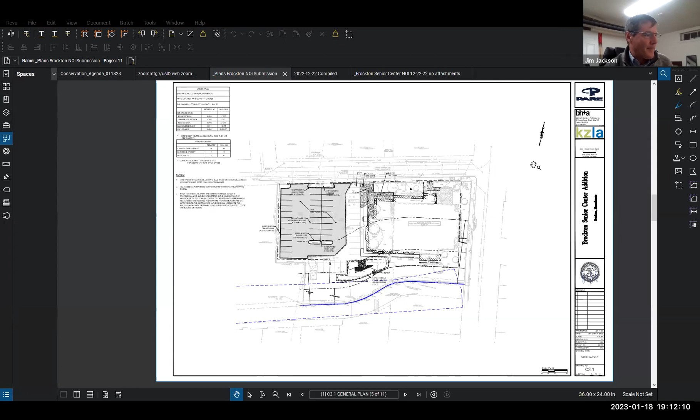Is that coming up all right? It's really small. Not good for my senior eyes. Yes, adult size, please. Is that coming up in size here? Yeah, that's better. Getting there. All right, just going to do a quick overview of the resource area there.

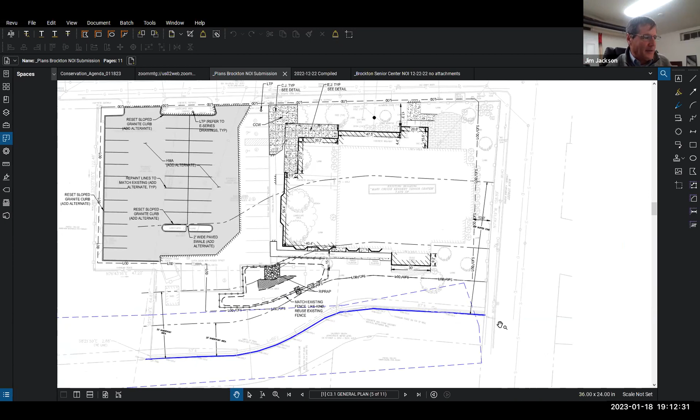Reason we're here is Salisbury Brook is to the south of the property. The portion that abuts the project is the concrete wall that retains the brook along here. Our surveyors picked that up, so that's an accurate location. We also had our wetland scientists go to the site and confirm that that was actually the limits of the resource area, and they were able to do that.

So the existing conditions: the parking lot here drains to a catch basin, which then goes back into Father Kenney Way road drainage system. The new parking area that Brad was just talking about is in this general area here, and some of that flows to the catch basin, and some flows to a bioretention area that was constructed with that 2020 project to expand the parking. That bioretention is right here.

The main addition is this piece. This is the edge of the existing building, and the new addition is right in here with more addition in front of the building, and this small piece on the back in the footprint of the existing sunroom that is going to expand the kitchen.

So what we have done to accommodate the new drainage from the addition: we're going to have more impervious area from that, so we're going to collect all the roof drains, which are clean runoff, and direct them into the bioretention area. We will do an enlargement of that bioretention area to accommodate the increased flows from the addition.

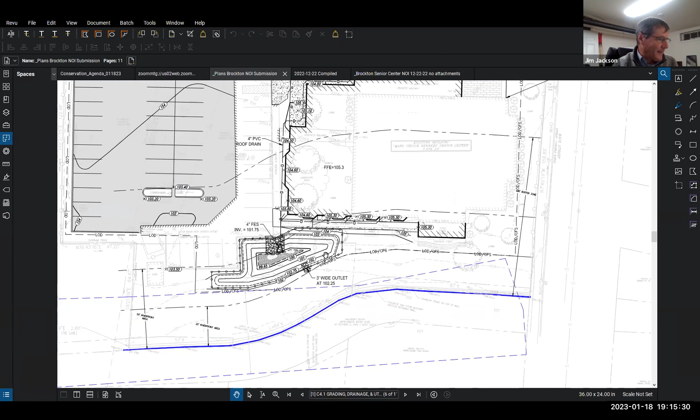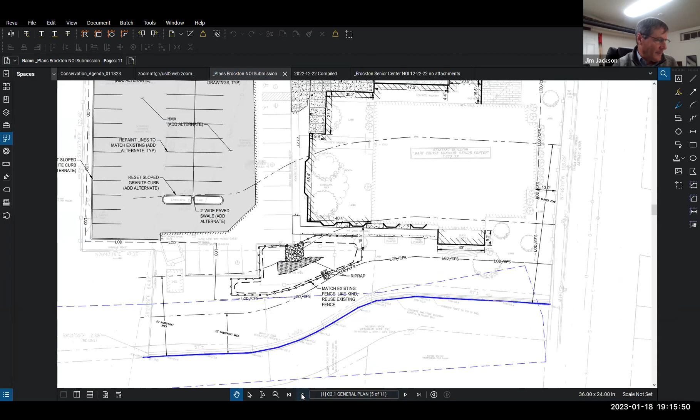It's not significant. This is kind of a footprint of it here. It's about a 40-foot by 15-foot area at the bottom, and the previous was probably about a 10 by 20. So we've increased it.

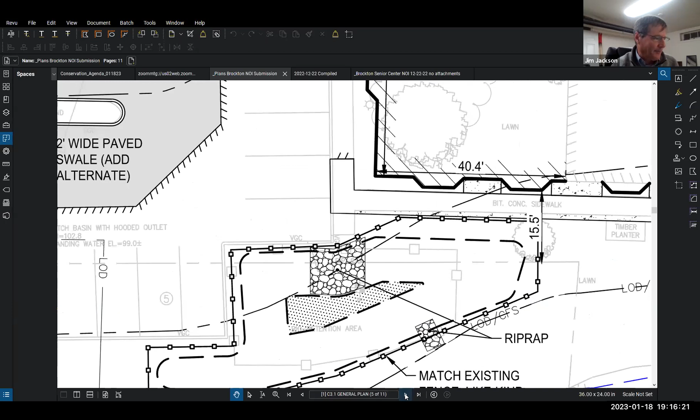I have a question. I've been to the senior center and I've seen that retention area. Doesn't it have plants planted like blueberry bushes and things at the bottom of it? It did have a couple of bushes. They didn't look all that healthy this time of year, but we do have a landscape plan where we're going to improve that area.

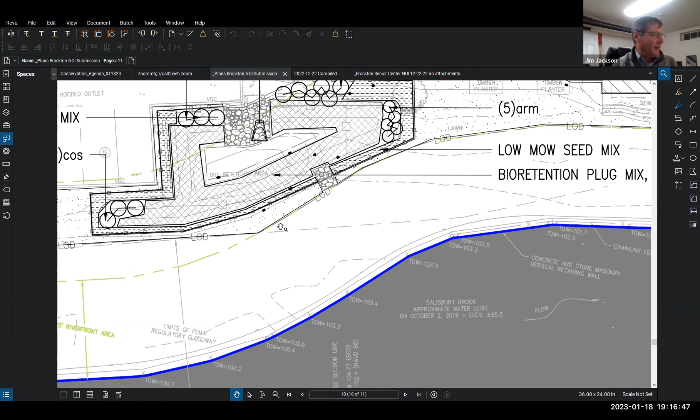But there'll still be vegetation at the bottom of the retention area? The bioretention area itself will just be the bioretention soils, but we will have a bioretention seed plug mix on the side, and then we're adding shrubs around the bioretention area, as well as some trees on other parts of the site.

And on the back of the building, they had two garden areas. Is that being removed, or is it being retained? Planters, yeah, these two planters here. Yes, Brad, do you know if those will be retained?

Yeah, I think the intent is to relocate them if we can. We've got a new sidewalk that serves the kitchen area here, and they'll probably have to be slid down south just slightly. I know that the Boys and Girls Club comes and helps them plant flowers and herbs and things like that.

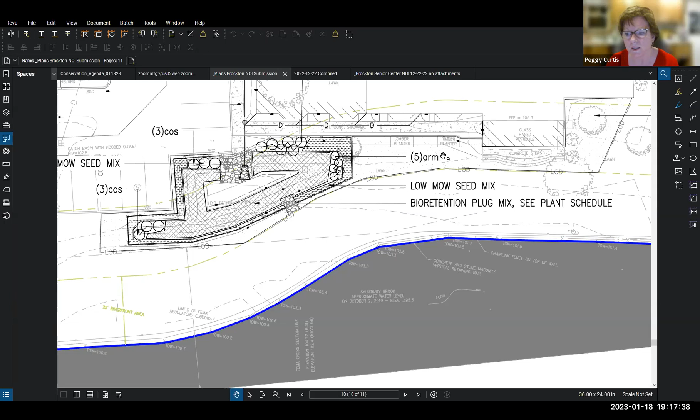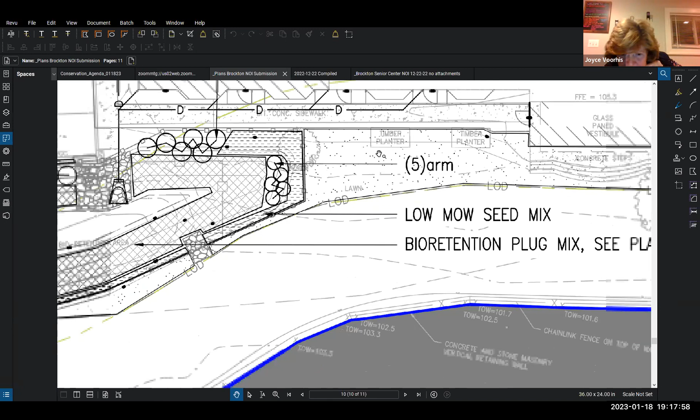Yeah, so they're basically right on the edge of what will be the sidewalk. I think they'll have to be displaced during construction and then reconstructed. So the edge of that retention area is right up against the 25 foot, is that right? 25 feet away from the riverbank? This line here, so yeah, we're just a couple of feet off of it.

Is there anyone else from your applicant pool that would like to speak?

Ms. Fitzgerald? Yes, hi. Good evening, Madam Chair, and good evening, Commissioners, and good evening, Mr. May. It's great to see you all. Let me first say thank you to Megan. We've worked on a previous project together, and you were so easy to work with, so helpful, and I wish you luck in the future.

As Brad had mentioned, the building is getting a little old. It's 20+ years old, we haven't done any renovations or updates in that building. Our recent 2020 census has educated us that we've had an increase of over 3,400 older adults in the community. So certainly we need to have a senior center that can accommodate the increase in numbers. The expansion does improve our ability to serve the community and provide the programs and services to our older adults. I'm in support of this project, and I'm always available if anyone has any questions. Thank you.

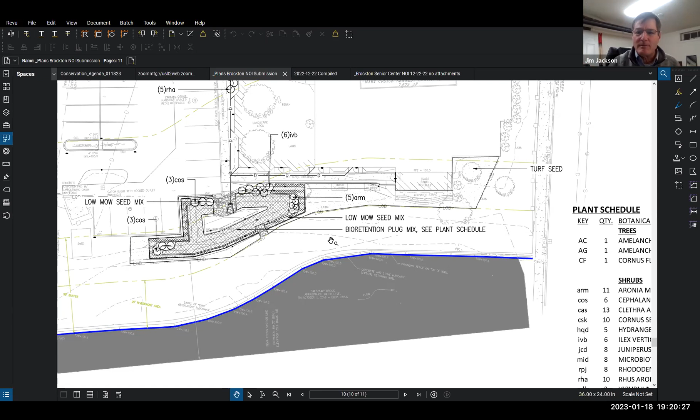Is it Mr. McCord that has control of the map? It's myself. Okay, could I just see, not the river side of the building, but the other side of the building? Is there any room to build out on that other side? Or up towards Father Kenney Way? Where's the road limit? Yeah, so here's the curb line. We are building out in that direction somewhat. And we're trying to re-landscape that area too to improve it.

If I can add to it, this is Brad McCord from Bargman Henry again. So our intent was trying to stay within the building footprint, again staying underneath the canopy for our extension, and minimize any kind of additional building towards Father Kenney Way. I will note that there's a memorial brick paver patio that we're maintaining, right where Jim's got his cursor. We're extending the sidewalk so you can access that still. And then proposing a few new trees, as Jim had mentioned, kind of throughout the whole site as much as we can. Not a lot of green site on here, but we're trying to take advantage and put some more vegetation back on the corner.

Is 4,000 square feet really enough to accommodate the 3,400 people that have the influx? It looks kind of small to me.

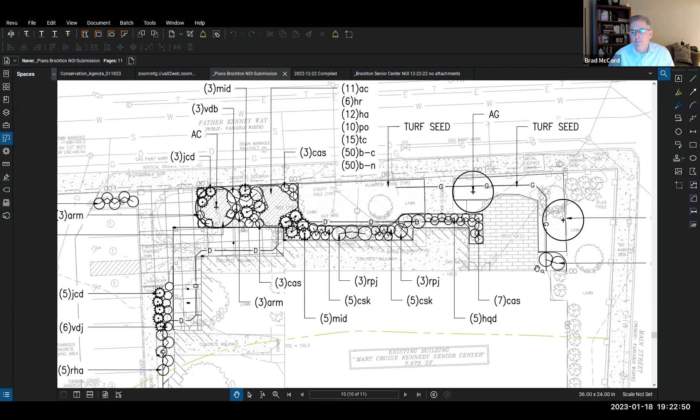So what we've done, I'll speak to it and then I'll let Janice add. What we've done is we've tried to create as much flexibility in the space. We've got the multi-purpose room, we've added about 1,000 square feet, but we've got it subdividable so that we can divide it into 3 different meeting groups or activity groups simultaneously. So I think that's a big plus right off. And then we're also trying to take advantage of some smaller social gathering spaces for those groups that don't need much, just a small group of 2 or 3 people that can meet and talk. So we've tried to take advantage of every square foot and make it as flexible as possible to serve a wide variety of needs.

And Madam Chair, by adding the additional multi-purpose rooms, if you're familiar with the senior center, a lot of times we have to turn people away when we have large events because we just can't accommodate them. But by adding those, especially those 2 extra multi-purpose rooms, it gives us more opportunity to have larger events, but also we can divide up those rooms to make smaller rooms. The center, as you walk in now and see the grand fireplace, that's a beautiful area, but it's non-functional for us.

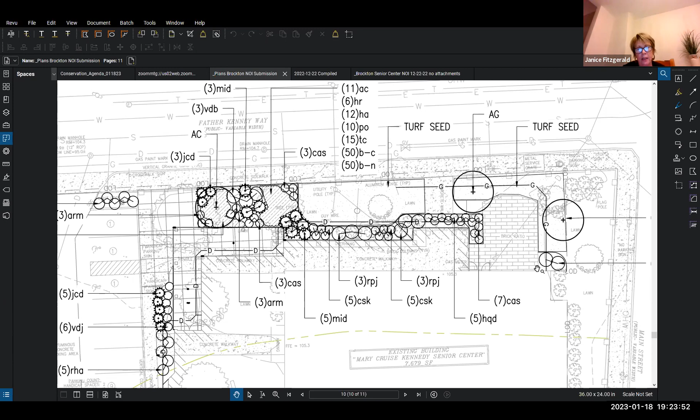We can't hold events, presentations, things. It really is wasted space. So by configuring that, relocating the kitchen, giving us additional multi-purpose rooms, and repurposing some of these other rooms along with additional office space, which allows me to bring in additional staff.

I think what the designer has come up with is really great use of what some may say is a small area. We've looked at this, we've discussed it, the staff has looked at it, the board has looked at it, we've all reviewed it, and we think what the designer has come up with is really a functional, nice space for the older adults in the community.

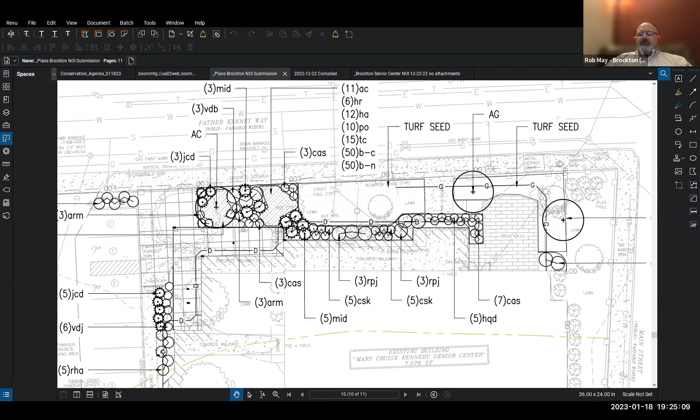Madam Chair, if I may, a city the size of Brockton at 106,000 generally has a larger senior center than what we have, even with this extension. We generally have more staff, but given that the city is budget constrained, this addition is going to allow a lot more flexibility and usability for Janice and her staff, who do a marvelous job of taking care of the seniors in our city.

I've heard nothing but good things about the senior center, really. I haven't made it over there yet, although my age says I should, and I will. But thank you. Thanks, Mr. May.

I didn't mean anything by the smallness, I just figured you need more. I've been to the senior center and it's wonderful. I wanted to make sure you have enough space to do all the wonderful things that you do, and after the extension, you don't want to outgrow it too quickly and then want more space. So that was the reasoning behind my asking that question.

Thank you, that was a good question. Mr. May, is that the only senior center in Brockton? Yes, ma'am, it is. Wow, amazing what they do out of that space. Peggy, we should have a larger facility. Unfortunately, budget wise, this is what we've got. Thank you.

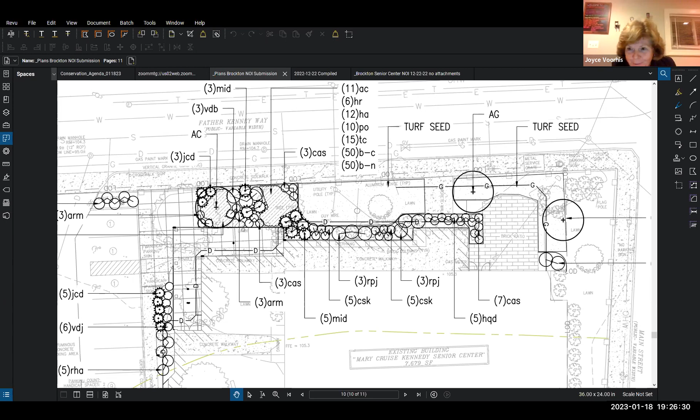I don't see Dr. Shave. Dr. Shave, are you there? For some reason you've dropped off my screen. Your report, do you have anything? I'd really like to hear what your report has to say. Your summary? So just to summarize what we're looking at for resource areas here.

As was mentioned, we're looking at Salisbury Brook to the south of the site here. Salisbury Brook is channelized, it has a concrete bank, so to speak. So jurisdictionally speaking, the bank is basically at the channel. And because of that, both the 25-foot riverfront and the 25-foot buffer zone to bank overlap due to the verticality of the bank itself.

So based on that, they're proposing the same limit of work that they used when they did the parking lot expansion about 2 years ago. So they are proposing a limit of work along that boundary, which keeps them out of the 25-foot buffer and the 25-foot riverfront. Fortunately, as they explained, the area where they're doing the expansion is already their existing lawn and walkway area, so they shouldn't need to do any additional clearing within the remaining buffer zone. They should be doing the construction within the existing lawn area and then the expansion of the existing bioretention basin.

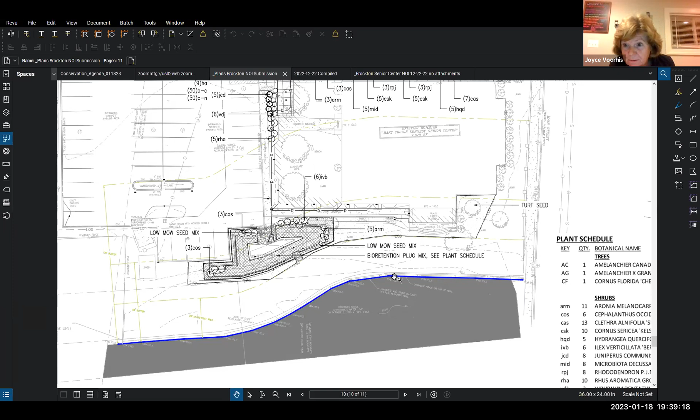Commissioners, any questions, any more comments, concerns? No? Okay, then I would entertain a motion to close the hearing. I make a motion to close the hearing. Second. Motion has been made and seconded. Vote please. Biegler, aye. Curtis, aye. Voorhis, aye.

Are we making a motion for a partial certificate of compliance? Notice of intent, hang on. Yes please. Okay, I make a motion for a partial certificate of compliance. I think it's order of conditions, right? We have to issue an order of conditions first. Oh, right. And the compliance is after things have been done. Okay.

So we need a motion to issue the order of conditions with the special conditions, including one that requests a report from the city engineer. Okay, I make a motion for order of conditions and to include a final report from the city engineer after all relevant boards have been evaluated. Second. So the motion has been made and seconded to issue an order of conditions for Father Kenney Way for the senior center expansion with special conditions, including the final report from the city engineer after all boards have been evaluated. A vote please. Biegler, aye. Curtis, aye. Voorhis, aye. Thank you very much. Motion passes.

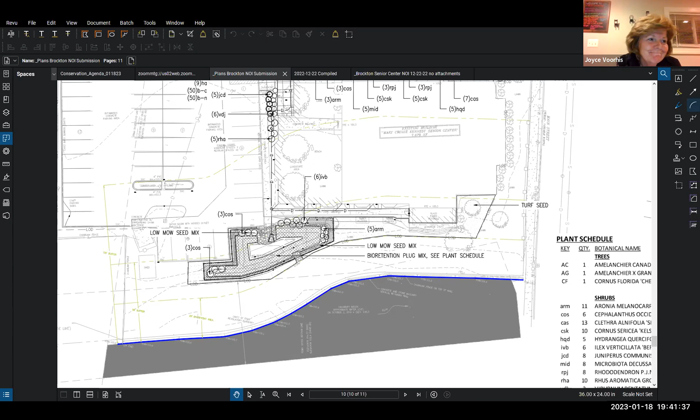Let's see, I believe the last item on the agenda is a request for amended order of conditions, 455 Oak Street, parking lot and drainage improvements for the Fuller Craft Museum. Okay, yes, so this is an amended order of conditions, so the file number is the same as the original order of conditions. We did receive certificate of mailing for the abutter re-notification as part of this process. Thank you.

And now we have applicants present for presentation. Hi, yes, we should have Steve Ivas, the wetland scientist, and then Timothy Power and Steve Bernstein for the engineering. Mr. Power, Mr. Ivas, who's first? Mr. Ivas was going to start, but Steve, you are muted at the moment.

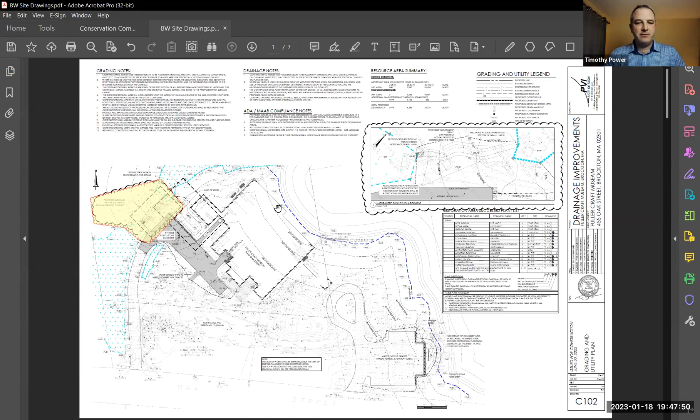Just to follow up with some pictures on what Steve mentioned: the area here in yellow is what we talked about. This is the overall site plan for the original notice of intent and what we submitted as amended. I have some pictures of the parking lot. This is the area of the parking lot in dark gray that we regraded and pitched to go to our rain garden infiltration basin, which was here, and which all seemed to work successfully at the outset.

Then we got some substantial rain, and the IVW, over here, started to fill up and overflow. Water was flowing out in this direction onto our driveway, causing puddling in this area. We tried some pavement shimming first to help shed that off to the sides, but it just moved our puddle a little further up. The IVW continued to feed water, which eventually spilled to these smaller isolated wetlands, and then spilled across the parking lot towards our rain garden and infiltration basin. That basin stayed full of water continually, and we had a puddle on our new driveway and a continuous stream of water, which created potentially icy conditions once winter really got cold. Luckily, we didn't have any icing because the weather was a little warmer.

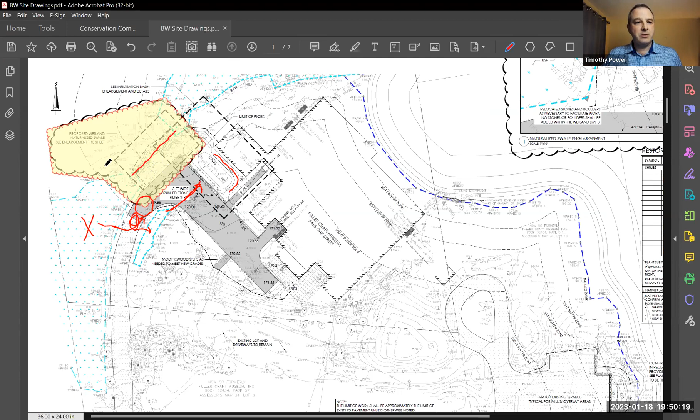I'll show you where our puddles were. On this side is the isolated wetland. You can see the water, the puddle in the middle of the picture, and you can kind of make it out here on the side.

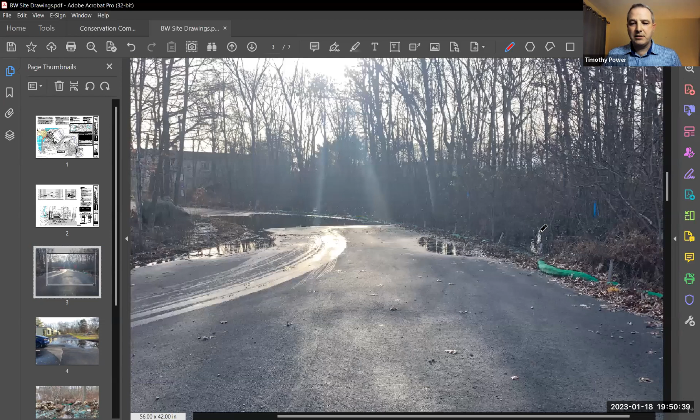The wetland is full of water, you can see the reflections, and that's what's feeding this puddle. It continues around to the smaller one, and you can kind of see the edge here, which outflows to my next picture.

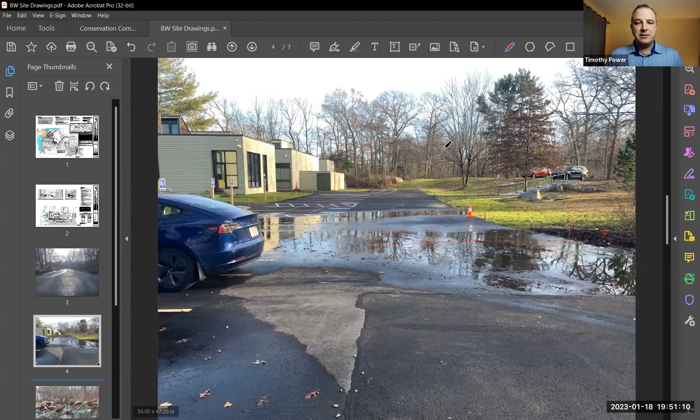A lot of this was old fill. There was a path going across this at one point, sort of an informal path, but you could clearly see there were piles of leaves and whatnot that had been filled here over time. So we excavated that out to make the connection across.

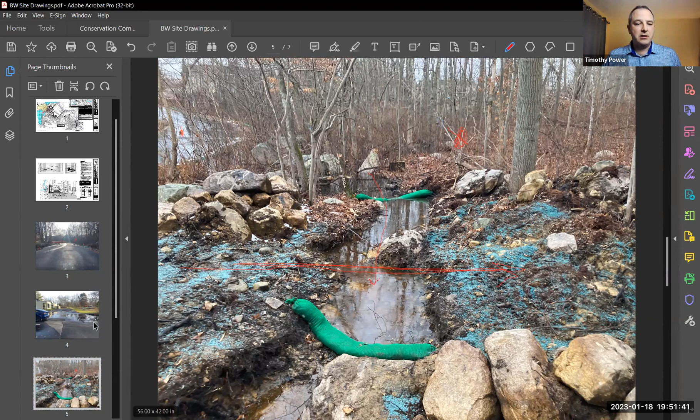Here's another view, a little further down, you can see the wattles. We've spread the blue tackifier on the banks to hold the soil in place until spring, when we can get some growth and seed planted.

Here's a view again looking across the path. The isolated wetland is on this side, and flow is going this way. This is our tackifier and the wattles that were added.

So it seems to have been successful in solving the problem somewhat. We are getting some backflow from this into our rain garden, so we're still studying how to remedy that.

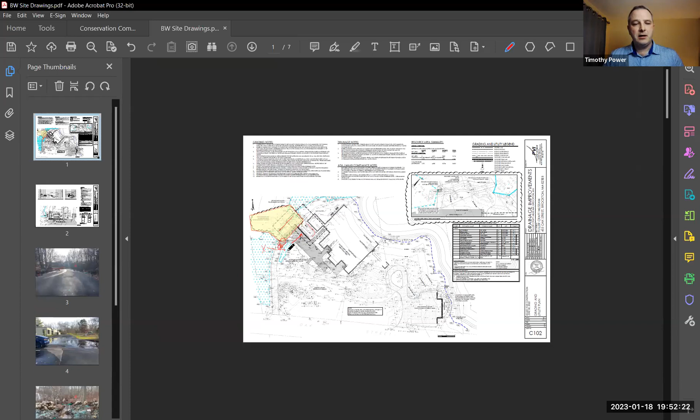Looking at the plan, the water is now flowing through our new channel. But given the grades here are all very flat, we're seeing some water sort of come back into our rain garden, which is making it difficult for that to drain.

Over the summer, of course, we had a drought, so we didn't have this water here. Everything seemed dry. We did soil tests in our infiltration basin and saw no signs of groundwater.

So this really, to me, seems like a surface water problem that we're working out. But again, we're going to take a closer look at the infiltration basin and the long-term functionality of that.

However, our immediate request for the emergency work and the reason for this amended order is the swale, which is in. We'll spread some seed and whatnot in the spring when it's appropriate to do so. I think I'm jumping around a little bit, but I believe that addresses what we're hoping to cover. I'm happy to answer more questions and go into more detail as we go on.

It's interesting, thank you. Did you call it tackifier? What is that?

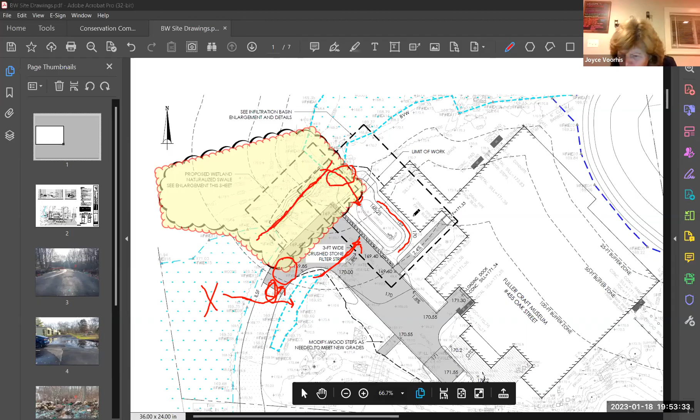Yes, tackifier. It's kind of a substance that will hold the seed and soil particles on the ground so the seed starts to germinate. You can buy it separate from the seed. So without seed, we just got the tackifier, and it'll hold the soil in place, so when it rains, the raindrops don't dislodge the soil and cause erosion. It's sort of the first line of protection, if you will.

So it doesn't have to be completely coated, even though... No, and that material tends to spread out as it's placed, from what I understand. They have a little bit more on site, so we can supplement areas if it's still bare, but I think it needs to get a little saturated and then it'll spread a little more on its own. I think that was a picture right away after the spread. They call it activation, with the addition of water, basically -- it's activated once you drop some water on it.

Okay, thank you. I have a question. Can you wait, Peggy, until all of the applicant speakers have spoken? Thank you, yep, just write it down.

Mr. Bernstein, did you have anything to add? Or Mr. Ivas? Not at this time. Mr. Bernstein? Not at this time. Okay, Peggy, sorry, go right ahead.

The channel itself, I thought was kind of small. Why isn't it deeper or wider? Were there any constrictions?